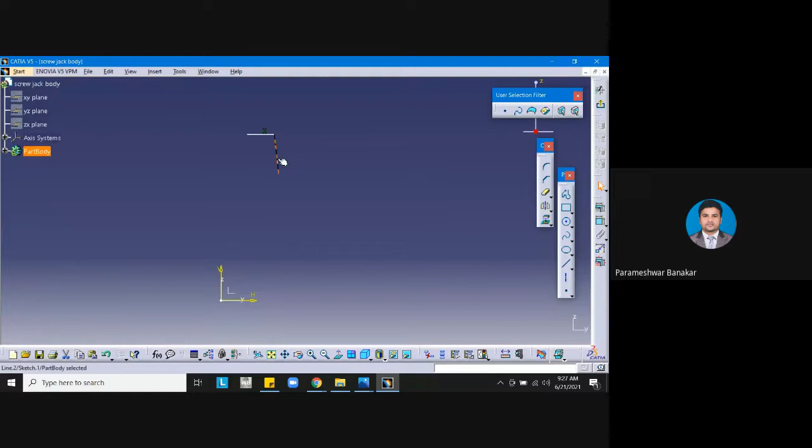I will take spline option. So from here I will come like this. I think it may look a little this way. Just a second, I'll make it straight. First you draw the rough sketch, then you can go for the final dimensions. Okay, I will just leave it here. Now I will go to the dimension, then I will draw them properly.

So height of this is 185. From here to here is 185. Okay, and from here to here it is 140. So before that, I will merge these two. Okay, I will coincide them with each other so that I will get the base coincidence. So it's done now.

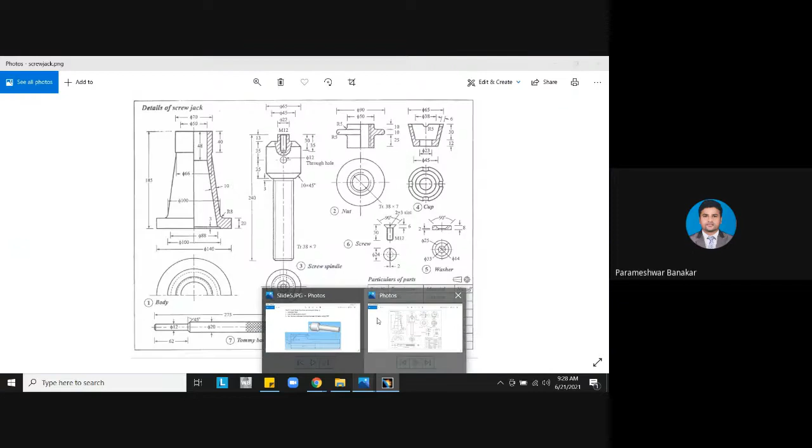So now what is the total height? Height is 185, right? So from here to here is 185. This is 400 is there. Make it as 185. See how it's moving now. So if this is happening, what you can do, you can bring up like this. There is a provision. Okay, you can just change whatever you want. You can do that. Okay. So 185 height we have given. Anyway, whatever method you are following, just follow that method and draw this particular hatched portion.

Okay, so now this height is 20, so this height I will give now. So this is 20. Go to constraint, give this as 20. Okay, just a second, I will bring it a little down. I'll make this as 20, and I think this is 40. This will be 40, right?

So vertical dimensions, sorry, in the z plane we have given all the dimensions. We need to look for the y axis, what all dimensions are there. So from here to here is 140. That means from central axis to the end of this portion is 70. Okay. So from here to here is 70. Let us give that dimension.

So this is 224. Okay, we will change it, and from here to here is how much? Let us see. So from here to here is 100. That means it will be 50. So this will be 50, and this is 140. So it must be 70. Okay, but it has to.

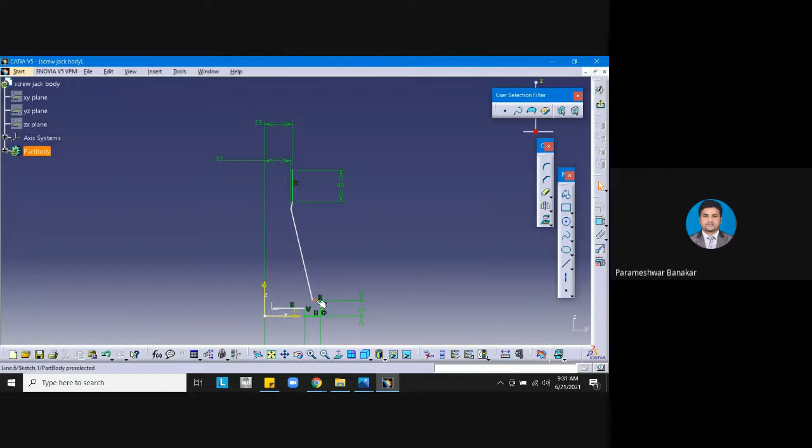And let us see, I need to move this a little bit like this, and I don't know what this one is. No, this also I need to write. So if we come here, this is also 100, right? From here to here is 100, correct? So that means it will be 50. Half of this will be 50. Before that, is anything else there? This is 3 mm. Okay, let us see. I will give a height of 3 mm.

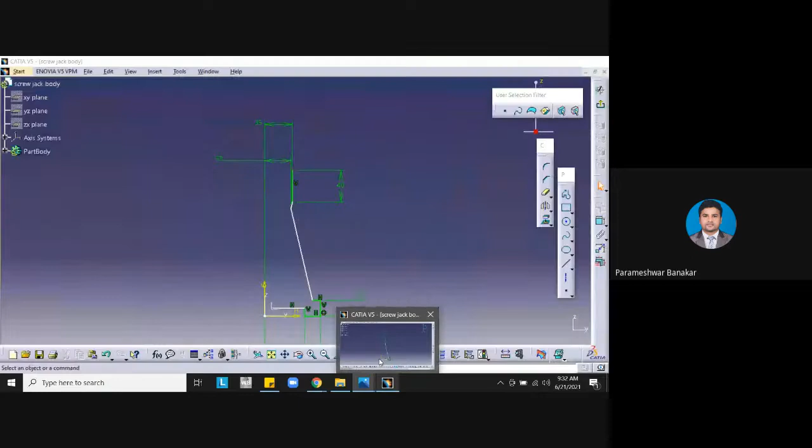I think this must be 10 there. It should be 3. Okay, 3 is there. Correct. So now from here to here it's 50, because there it is showing as 100. You can see this is showing as 100, but it is actually 50. From here to here is 50. From here to here it's showing as 60. I'll make it 50. Okay, done. You can see this.

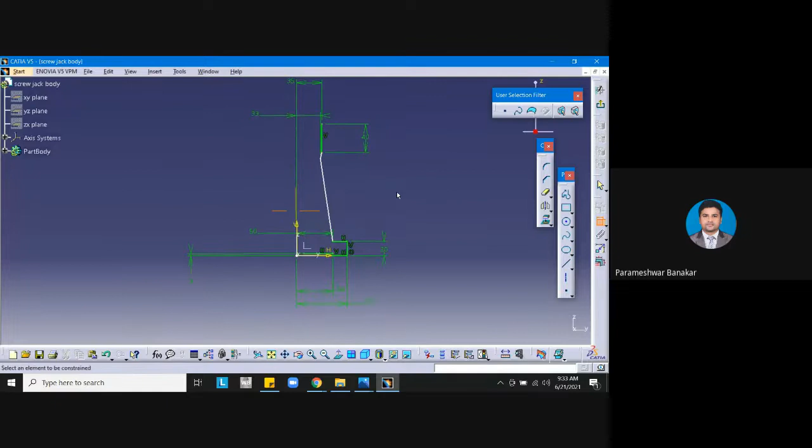Okay, so this is 40, this is 50, and finally this is 20, this is 50, this is 70, and this height from here to here is 3. Okay. So now again from this I will draw one more horizontal line like this, right? From this horizontal line to the base is 185. It is correct as it is. 185 is there.

Okay. So now, in order to create this portion, I have done it like this. This portion I have created. I need to create this line and this line. This line has a height of 48, but it will not be 48, it will be a little more than that. So we'll not consider this. If it comes in the exam also, don't consider this. Directly draw one line located at a distance of 25 from the central axis.

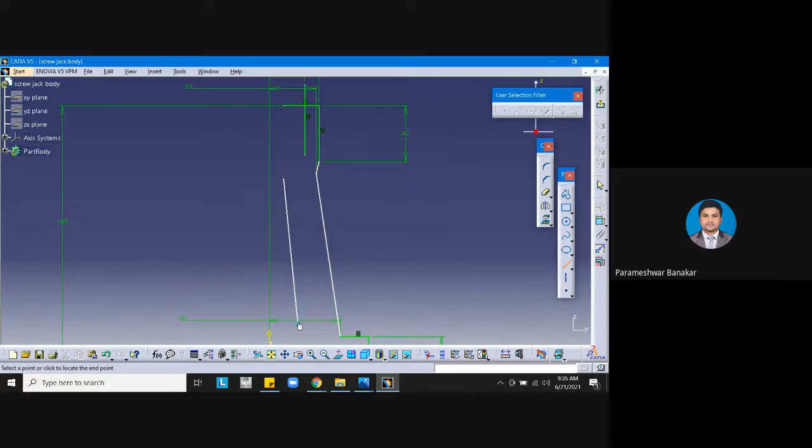So now I will draw one line, simply a random line, and I will give a dimension for it. From here to here is 25. Okay, it's 25. Now again I will create one more line parallel to this line, and the distance between them is 10. So I will go to dimension and mention that the distance between these two parallel lines is 10 mm.

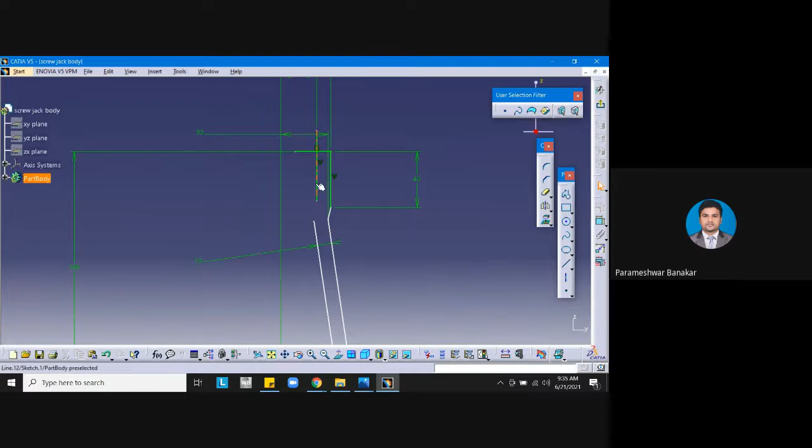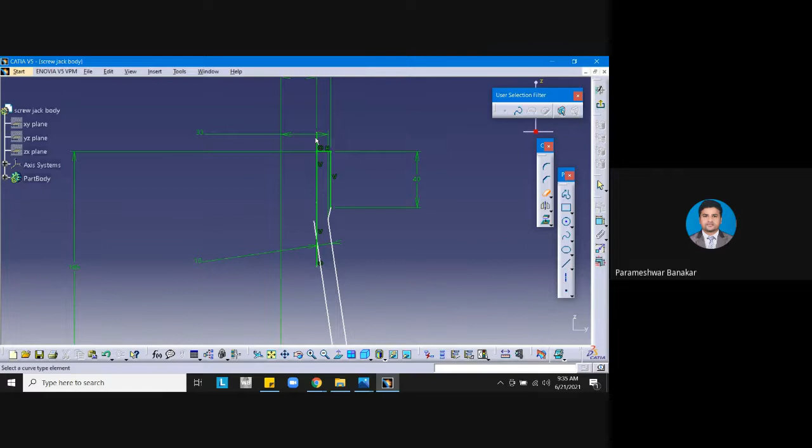Okay, 10 mm. I'll extend this line and bring it down where it should coincide with the line below. Just extend this line a little more. So it has coincided with this line, and the intersection point is there. Now you can use the trim command to remove these unwanted lines. Remove that unwanted line and this line as well. So now we have created this profile. Correct? We have created this profile.

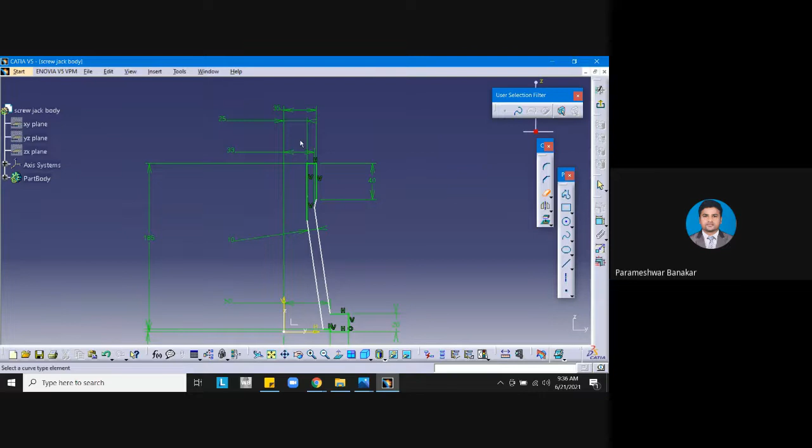So this is 40, this point is located at 33 mm, from here to here it is 35, and this line is located at a 25 mm distance, and these two lines are parallel. Make them parallel by applying parallelism, and the distance between them is 10. From here to here this point is 50, this is also 50, this is 70, and this length is 3. So now I will exit from the workbench.

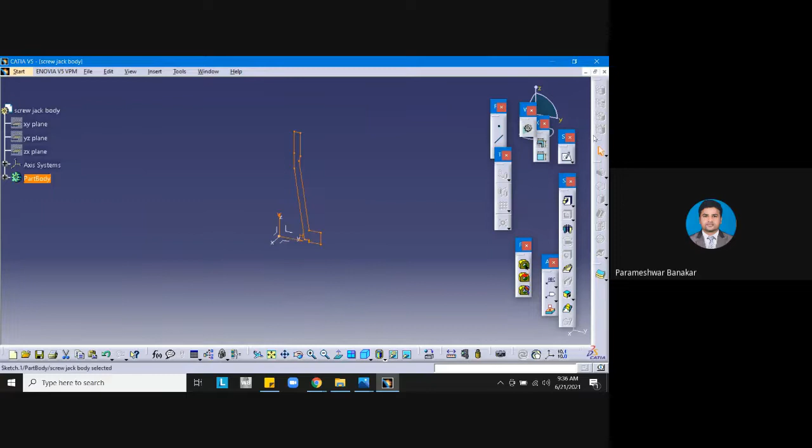Okay, I will exit from the workbench, and I will try to revolve this. Use this shaft option, I will ask for the angle. You give 360 degrees, and then axis it will ask, no selection.

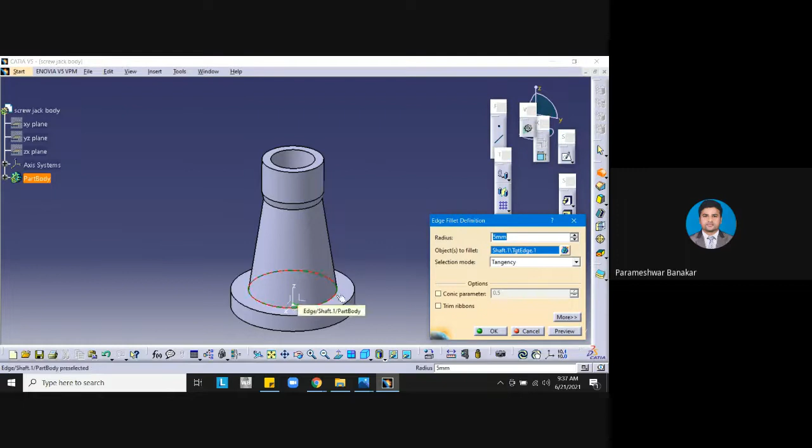Now I will select the axis. Preview, give OK. So your body of the screw jack is ready, but this radius we have not yet given. Now we will give radius of this curve. For that, go to fillet option, edge fillet is there. Click that and select this edge. It will ask how much radius you want. Radius should be 8, give OK. You can see, so this is done.

So body of your screw jack is done. This is one part. Now you can save this file, save. I will save in desktop itself. Screw jack body, I have given name, saved. So one part is ready.

So similarly now we need to build the second part. This also we will try to draw and see how we get the 3D model. Here also same case, you have to create half drawing of this particular screw spindle, like this. It will go like this, come like this, like this way, half. Then you revolve in the same manner as before.

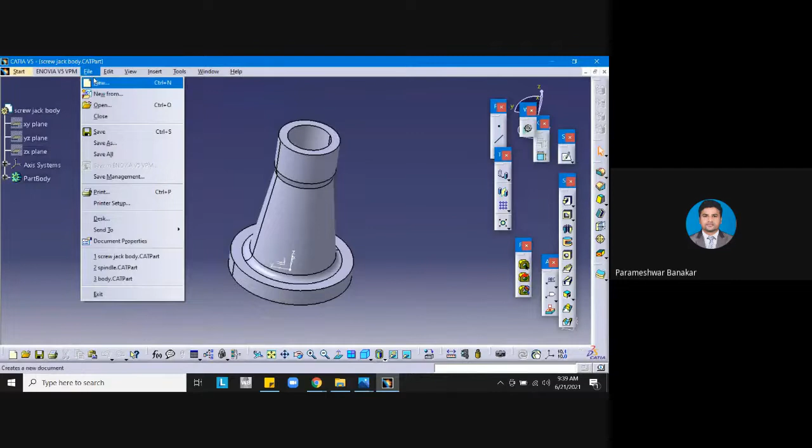So what I will do now, again I will go to CATIA, start mechanical design, or go to file, new, CATIA part is there, let me search. As part is there, you OK. What is this? It is spindle, screw jack spindle, give name.

Then as usual, hide these three planes. Go to insert, insert new axis system, you okay. Select YZ plane, go to sketch and create the profile of the spindle. So we need to create the profile of the spindle.

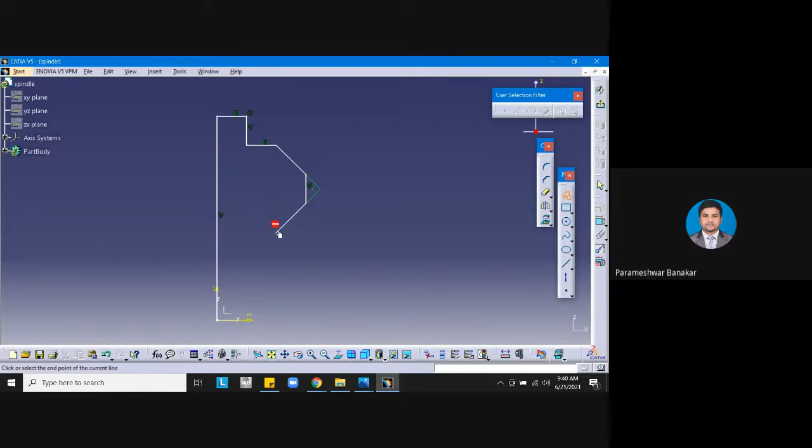For that, what I will do, I will just draw first the rough sketch like this. Let me draw the rough sketch. I think this is how it looks like. Let us see. Simply you draw first, don't worry about anything. Just draw a rough sketch like this and finish it.

Later on you can give the dimension. So what are the dimensions now? This is a rough sketch, how it looks now. What are the dimensions? You can see this, the thread diameter is 38, of which length is 7 mm. So 38 means this diameter is 38, that means from here to here it will be 19.

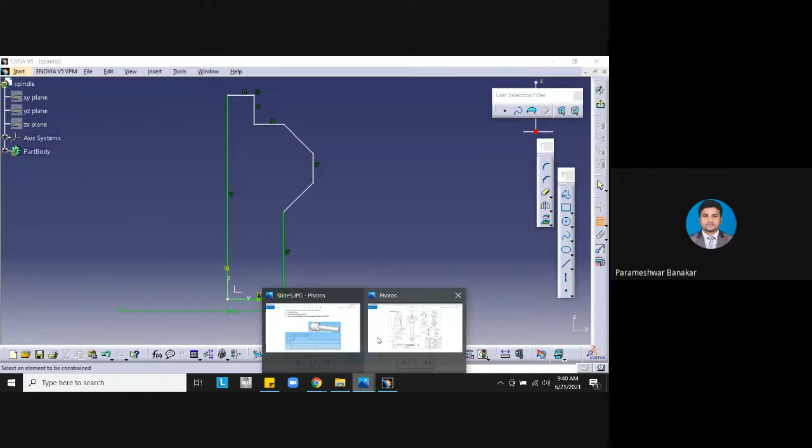So that dimension I will give first. From here to here is 20, it is showing. I'll make it as 19. Then what is the height? Height of the spindle is 240. From here to here you can see 240 is there. So I'll give 240, from here to the base is 240. This is 70, make it as 240.

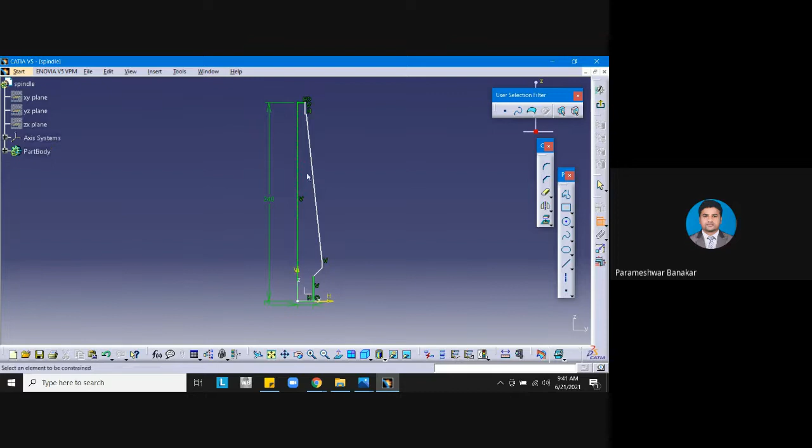So it will go like this. Don't worry, okay, don't worry. Always you have freedom to modify the diagram, whatever you want. Keep like this, whatever it actually deserves.

So now from here to here, the diameter is 65. That means from axis to the extreme end is 65 by 2, so that will be around 32.5. Let us see, I will give that dimension as well. From here to here, select this, from this line to this line is 65 divided by 2, 65 by 2.

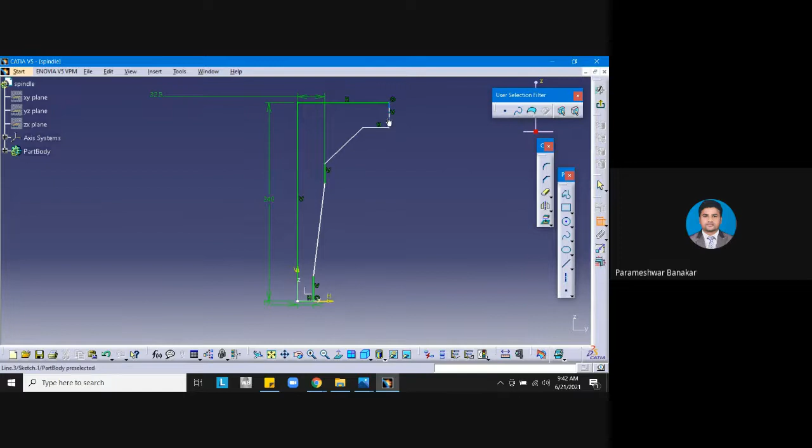Okay, this is done. So what is this coming extra? What we can do is you can trim, and you can draw one more again. If it's not coming properly, you can draw again. So go to line command, draw one small line.

Okay, and see what is the dimension of that line. So from here to here is how much? This is 22, right, so this is 22. 22 in the sense it will be half of that, it will be 11, from central axis it will be 11. So go to dimension, give this as 11.

And below this, one more line you create, and find out the dimension of that. So this dimension is 13. So this length is how much now? 13. So come to constraint, 10 is there, make it as 13.

Okay, so after this 13, it has come in this way. What is the dimension of that? 45 is there, the total is 45, from here to here. That means from this axis to this point is 45 by 2.

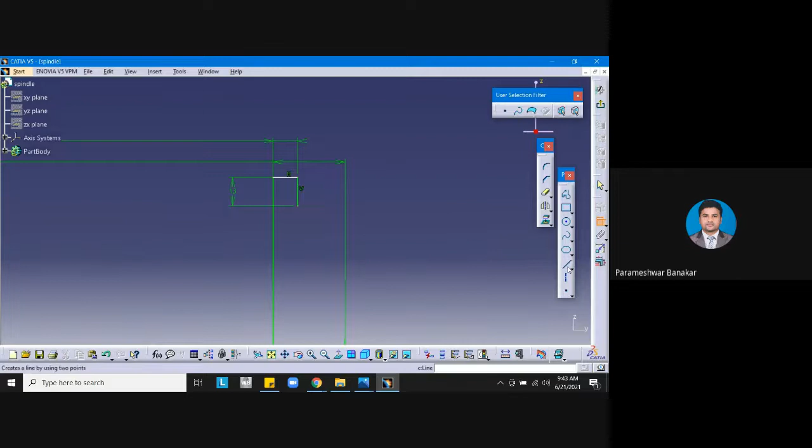Let me draw one more line from here to here, and I'll give the dimension from this central line to this extreme end. This will be 45, that means 45 by 2, which is 22.5. Okay, this much we got.

So now I will extend this line, and also extend this line as well. So now from this line and this line there is a chamfer, exactly it has to come here only, this point. So for that I'll trim this first, and trim this as well.

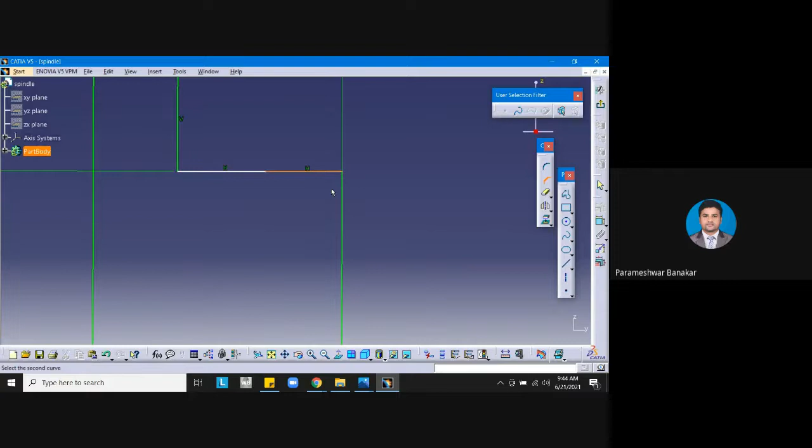Now I will apply chamfer. You can see here the chamfer option is there. Select this and this. Chamfer should be 10 mm, angle should be 45 degree, so this is 45 degree. The length must be 10 mm.

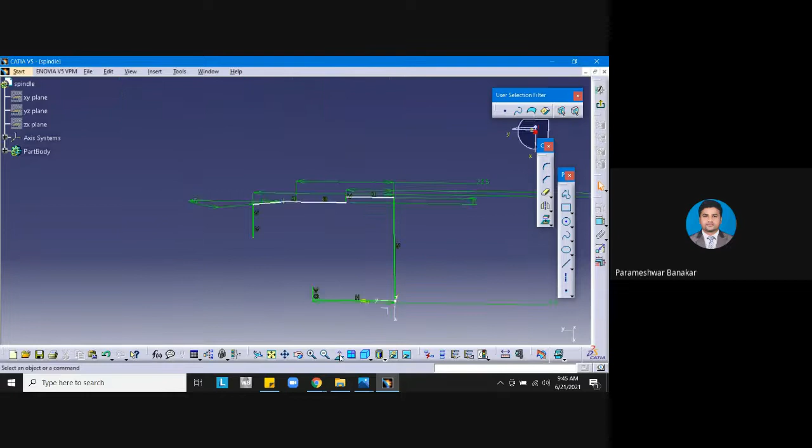Length must be 10 mm. This chamfer must be 45 degree, meaning from here only it should start. 10 into 45 degree they have given. If it is not coming exactly at this position, then what we can do is delete this, make it as it is.

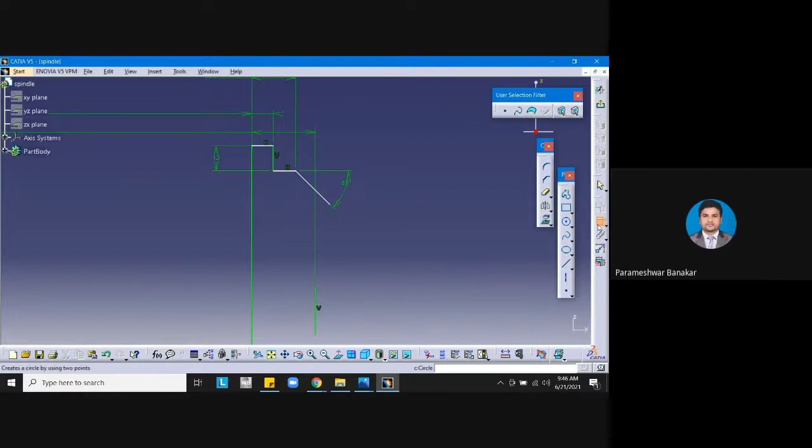From here you draw one line, and its angle must be 45 degree, from here to here. Angle must be 45 degree, and length must be 10 mm. Now you can extend this line a little up.

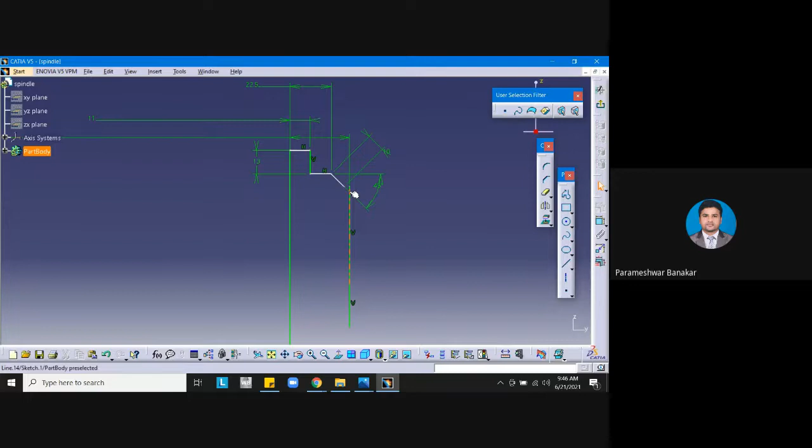Let me have a look. Okay, it's not exactly 10 mm like it will take, because if I do chamfer here, it will extend till here, the length will be more. So we'll have to go back to the previous method only, otherwise it will not get coincident with each other. Or else later on we can give the chamfer option in the part modeling, there also we can do it. But here we'll try to finish here only.

Let us see. This is 30, and this is 11. 13 is over, so from here to here he has given 45 degree, sorry, 45 mm is the dimension. That means from here to here it is 22.5, and from here to here is 65. 65 by 2.

65 by 2 is there. But if I remove this angle, I will remove this also. Let us see, I will try to extend this line and draw the chamfer. So trim this and apply chamfer.

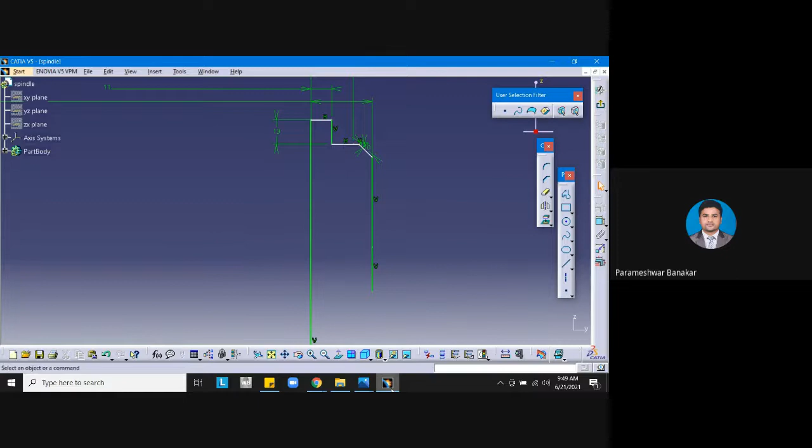No need to change anything, let it be like this. So now the total height, this is 30, 13, and below this must be around, let us see here, 13 is over, next is 35 plus 35, that means 70 length is there that we need to see.

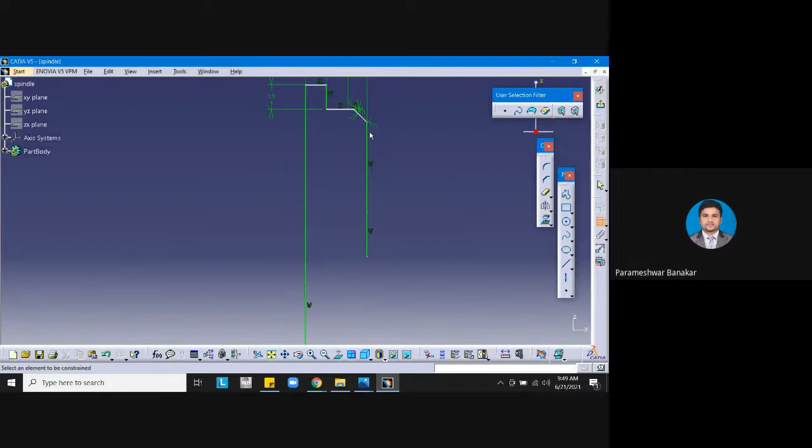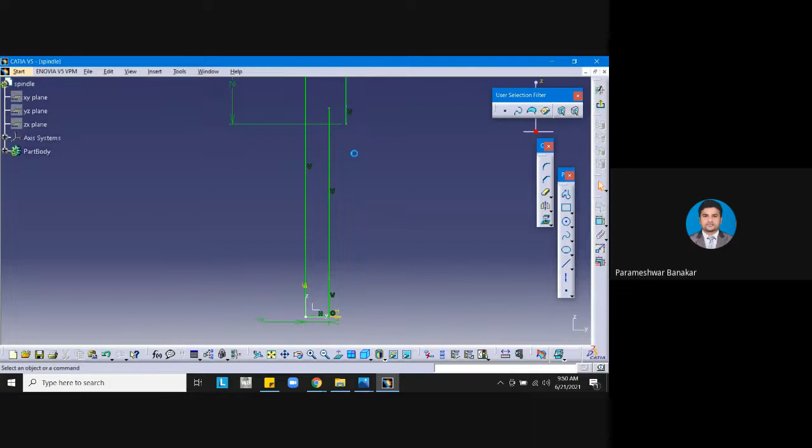So go to dimension, from here to the below point, let us say from here to here, this should be 70. So now after this you can extend this line using line command, extend this line, and also extend this line.

Now you can apply chamfer, I will remove this for time being, I will apply chamfer here. Again same case, it should be 45 degree and length must be 10, length must be 10 mm. Okay, so now this is done.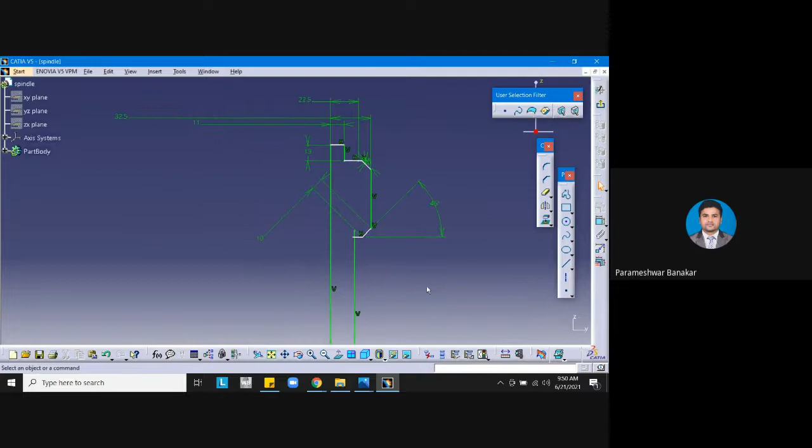Now use trim command, remove this extra line which has come here. And here also I think it is there, you can see, remove this as well. Just control Z, supposed to remove this one, green line.

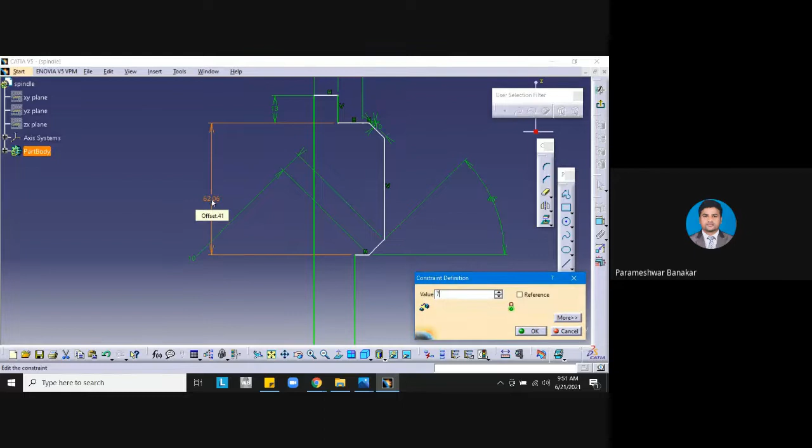So this is done, but now from this point it must be 70 degree, so 70 mm dimension. Let us see. 62.06 is there. It should be 70. Okay, so we have given 70.

So this is 45 degree. This is 10 mm, this is 10 mm. Okay, so now your profile is ready.

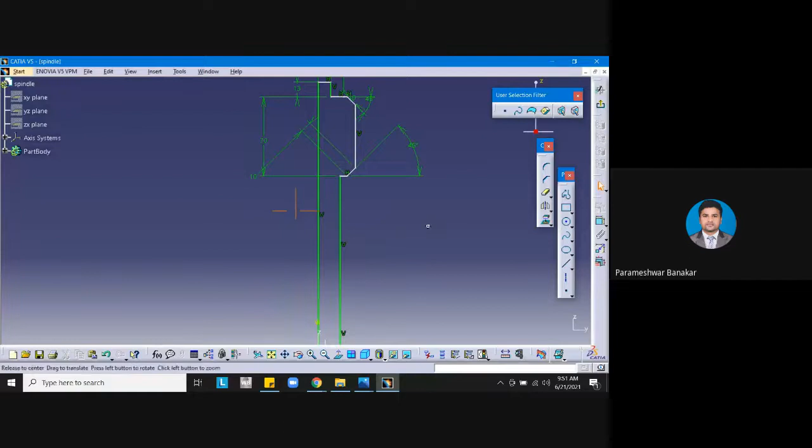What you can do is revolve this, so exit from the workbench. Go to shaft option, select the axis, select the 360 degree angle, select the axis. Preview, okay. So the spindle is ready now.

Okay, so in this spindle, one hole is there, M12, 12 mm diameter simple hole is there. This hole we need to create, which is having the length of 35 mm. Okay, 35 mm length is there that we need to create. Diameter of hole is how much? 12 mm. That will create.

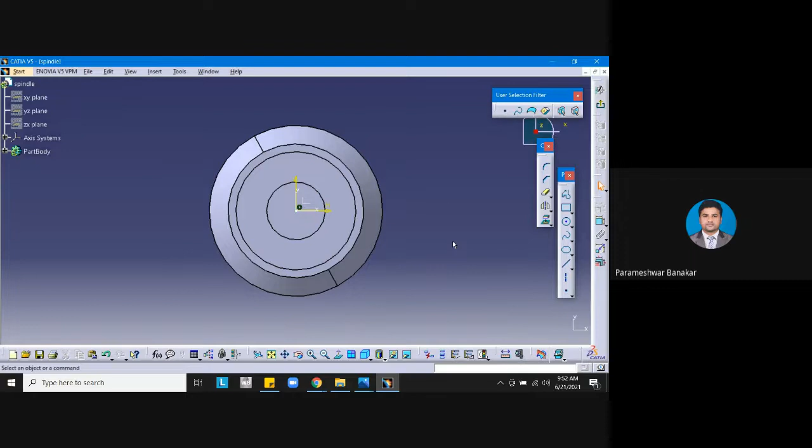So for that, select this one, go to sketch, create a point exactly at the center. Exit from the workbench.

Here you can see one hole option is there. Click this, and select this point where you want to create the hole. So it will ask which kind of hole you want to create.

So what I will do is create a blind hole only, and then depth is this much. Instead of flat bottom, you can have V bottom. So diameter of the hole is how much? M12, diameter of the hole is 12 mm. Give it as 12, so depth is 35 mm.

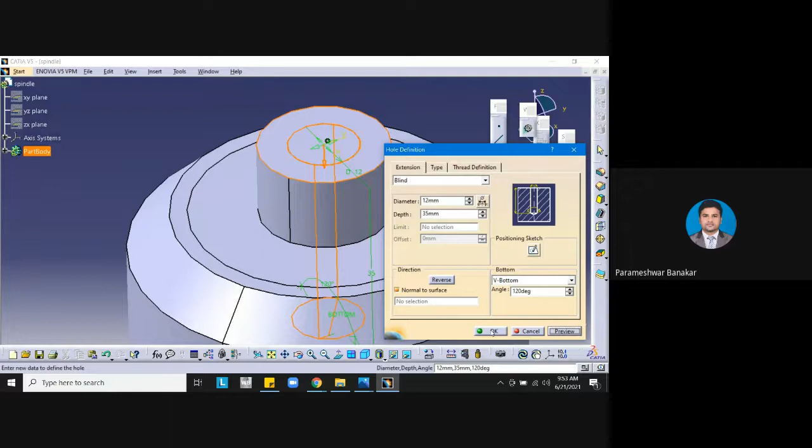35 mm is the depth. Okay, then you can preview this and give okay. So the hole is created, you can see this, the V bottom hole is created.

So again, if you go to the same sketch, here one more hole is there, 12 mm diameter, which is called a through hole. This also we are supposed to create. For that, go here.

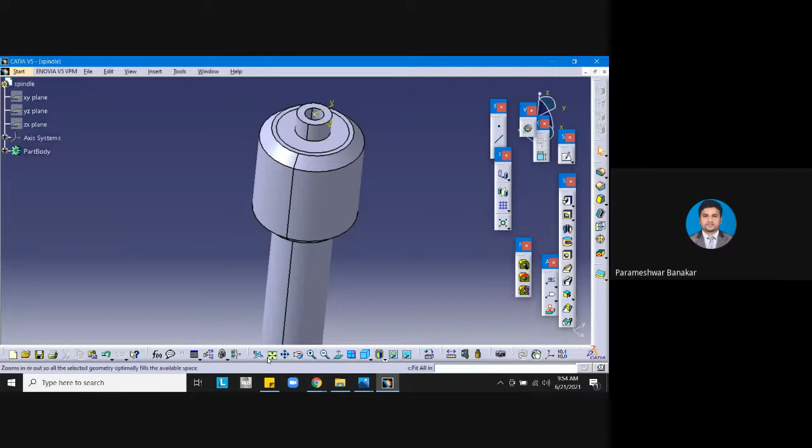Okay, select this, select YZ plane, go to sketch, create one circle. Okay, what is the diameter of that circle? That is 12 mm. So go to constraint.

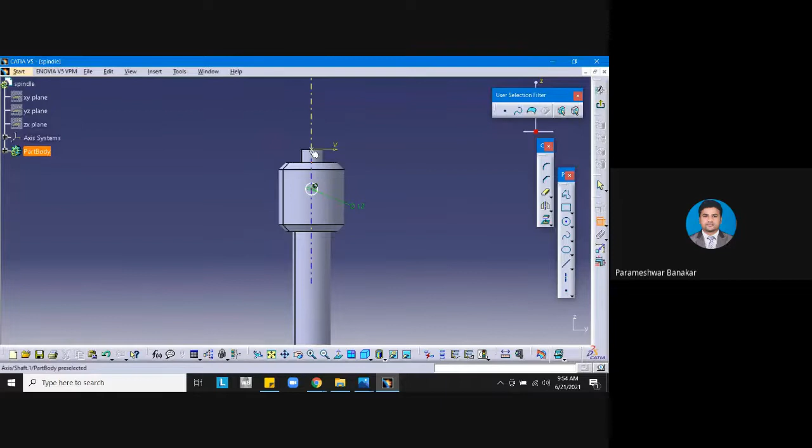Diameter is 12 mm. Where it is located? This is located exactly at 35 mm plus 13, that means from the top end it is located at 48 mm. At distance of 48 mm from here to the circle's center is 48 mm. Sorry, from this it is 48 mm. It must be 48 mm.

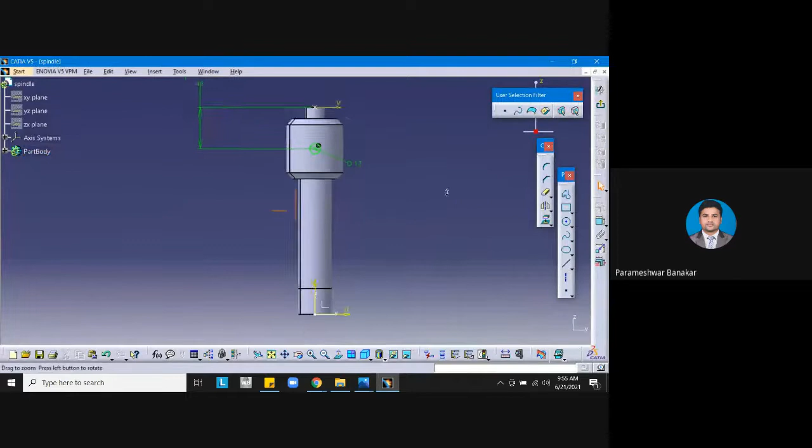This dimension is how much? 12 mm. Okay, so now this is created. Now what you can do, exit from the workbench, go to pocket option.

Okay, mirror extent, give mirror extent, and you can increase the dimension. Let it go out of the boundary, then preview. Okay, so you can see this, the hole is also created.

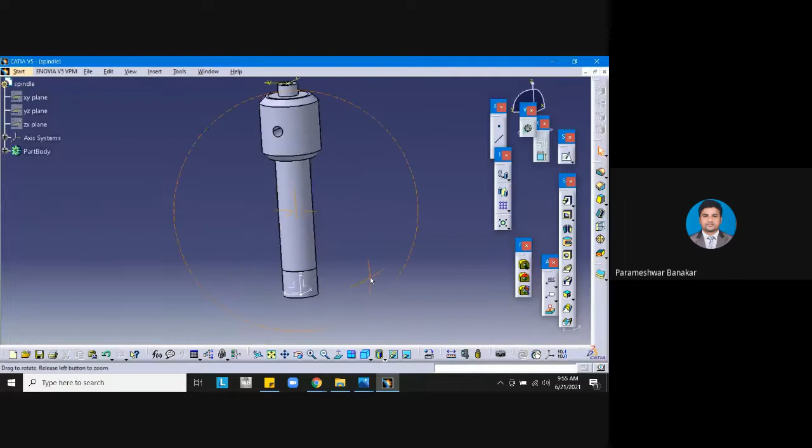So now for this, here the thread is there. This portion we have threading. Okay, you can see here the threading is there, that portion, thread 38 into 7 mm.

Okay, so the total length is how much? This is 240. 240 minus 86. That much of thread length we need to have. So just I will do 70 plus 73, 73 plus 13 is 86. So 240 minus 86 will be 154 mm.

So 154 mm will be your thread length. Okay, that also we can give. So what we can do is select this. I think thread option, we have to search for thread option.

Just a second, I think somewhere it will be here only. We need to drag it out. Thickness, I think here, thread. It is there, thread option is there.

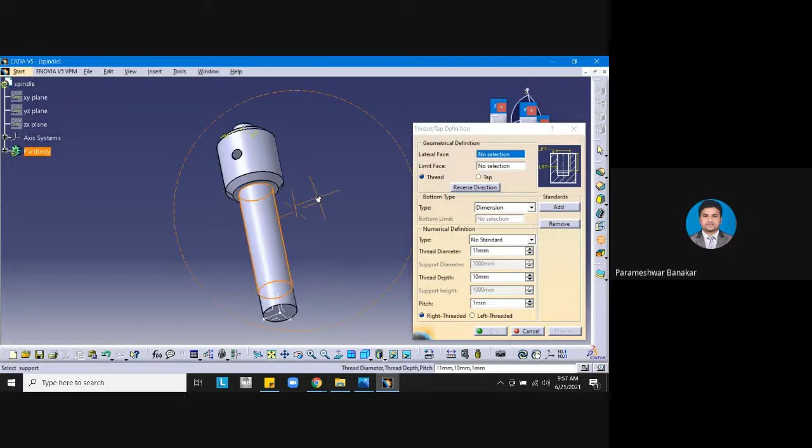Okay, so now it is asking lateral surface, how much you want the thread. Okay, so limit the face. I will limit the face till here. It is not coming, okay, we can create both at a time. Just let me select this as well.

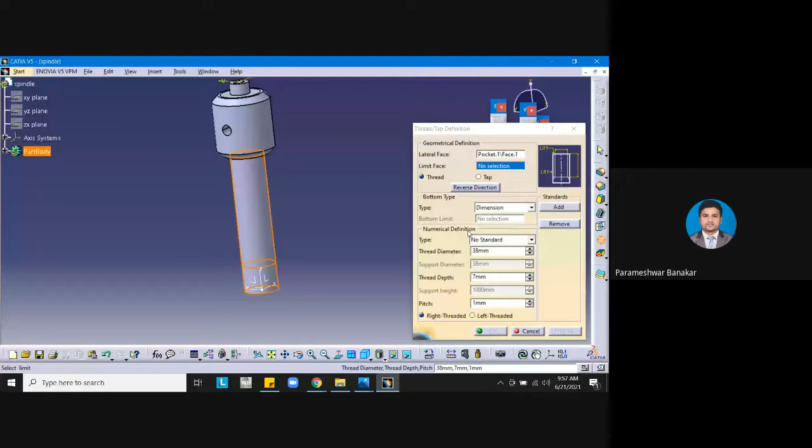So thread diameter is 38 mm. Thread depth we can give 7 mm as shown here. 7 mm is there. Okay, so total length, the dimension is how much? 154 as we found it. So limit face we can give this limit face.

Okay, we can give this, but if it is asking for dimension, then we need to add the dimension, but it's not showing. 38 diameter, thread depth, sorry, thread depth is, let us see, it is 7, it is asking 150. Actually thread length is, it is not asking. So that is a thing here I'm looking for.

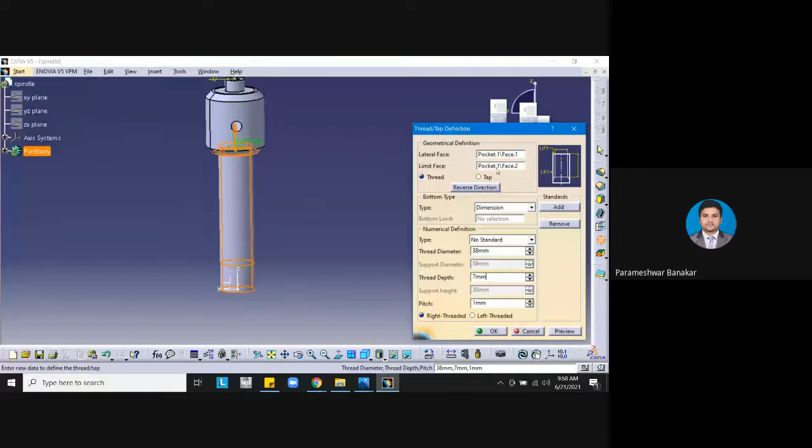Lateral face 1, 2, limit face 2. Okay, dimension, let us see. Anyhow it is not visible. Okay, let it be. You just give up to the surface here. Select the limit face and lateral face. Or else lateral face I will select something else. So I'll go to thread option. This is the lateral face.

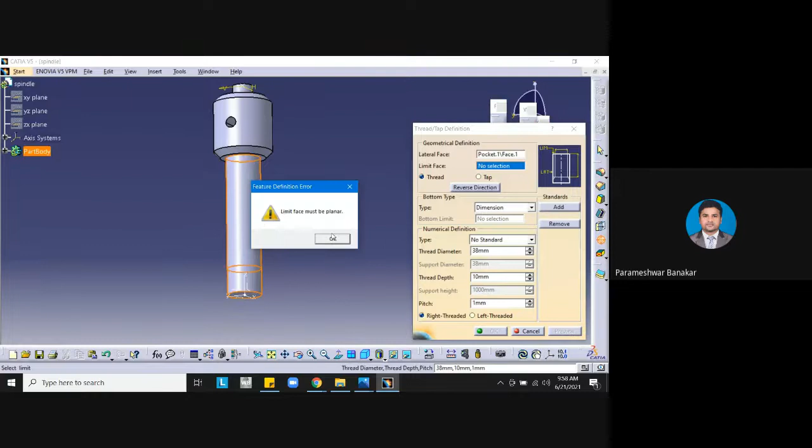Okay, just a second, it's not taking. Lateral face is selected. So limit face will be this. Okay, I'll go for 7 mm thread depth. So preview. The tap is out of support limits.

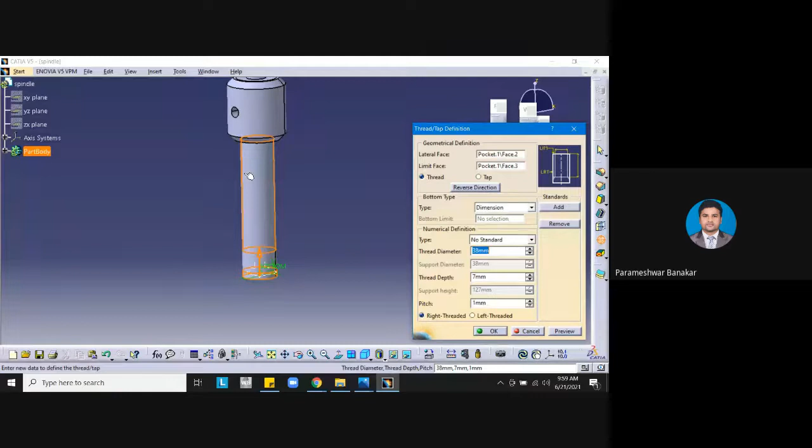Okay, because it is not having the one particular... Here, cut section is there. So we need to create one whole section which is not been cut. Then only it will take. Not an issue. We can do the threading later. Till here, I think you have understood.

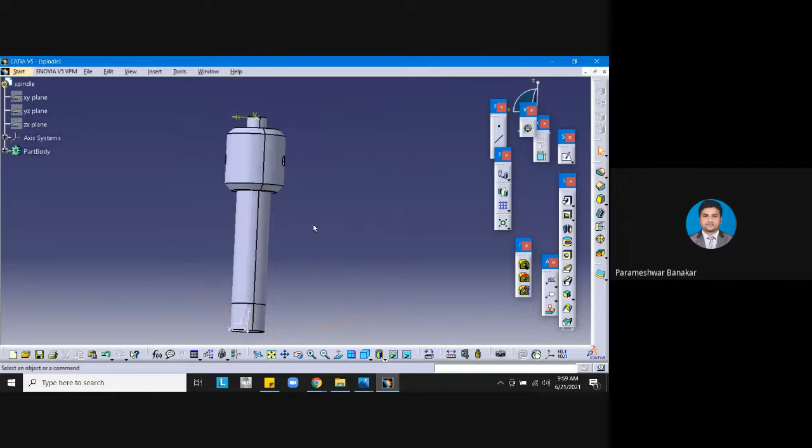We'll make the thread later while doing the assembly. Then we can join them. Otherwise, once again, I will build the same thing and I will create the thread there itself while doing the assembly. But remaining procedures except threading, everything is done here. So now we need to go for the third option.

So this is the nut we need to create. For that, we are supposed to have this particular profile, then revolve again, then you will get this nut. So again, I'll go to start mechanical design, or else I will go directly file, new, and I will take part new. New part is nut.

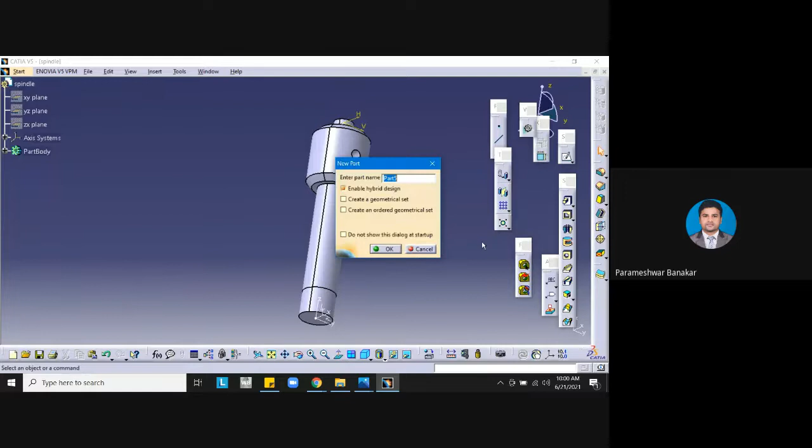So hide this and insert new axis system. So this we need to create. The hatched portion is there, you just create this hatched portion, then automatically rest of the things will come. So I will go with 50 and 90, and this is 10, this is 10, this is 25. This is easy to create.

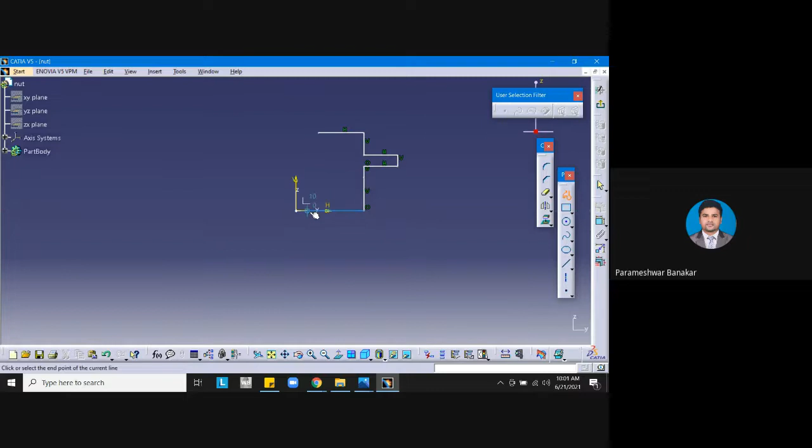So let me select the right plane, go to sketch option, I'll select this profile. So like this it is there. I hope it looks like this. Now we'll apply the dimension. So total height is 25 plus 10 plus 10, that is 45. From here to here is 45.

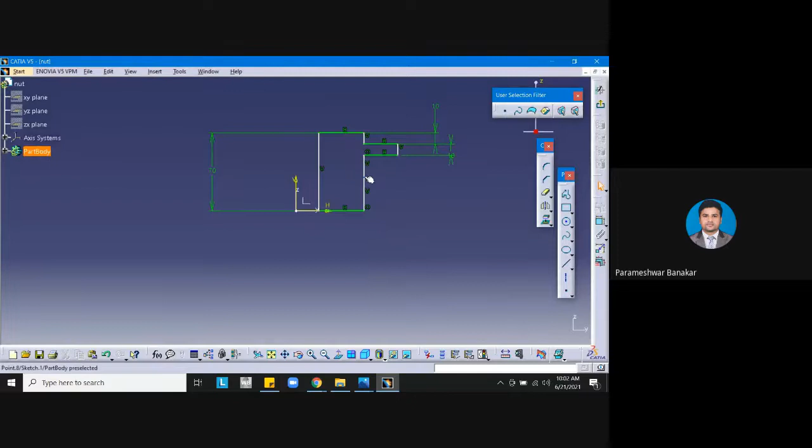From here to here it is, I think, 10. This is 10. And this is also 10. And this must be 25, I think. So this has 45, and automatically this will be 25. So let me trim this. And let me check the dimension of this. Yes, 25 is there.

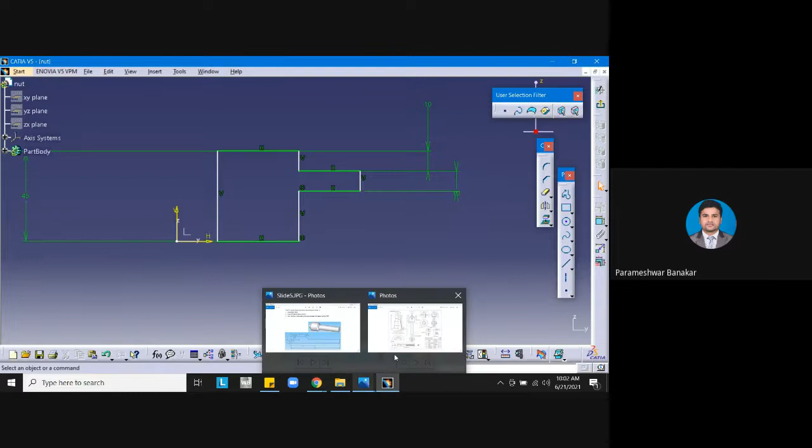So now that dimension I have given, from this axis to this extreme end is 90. That means it will be 45. 45 mm, and inner one is 25 mm. And the thread minor diameter is how much? 19. So from here to here is 19. Then it will be 25. Then it will be 45. So I will come from the central axis. So this must be 45.

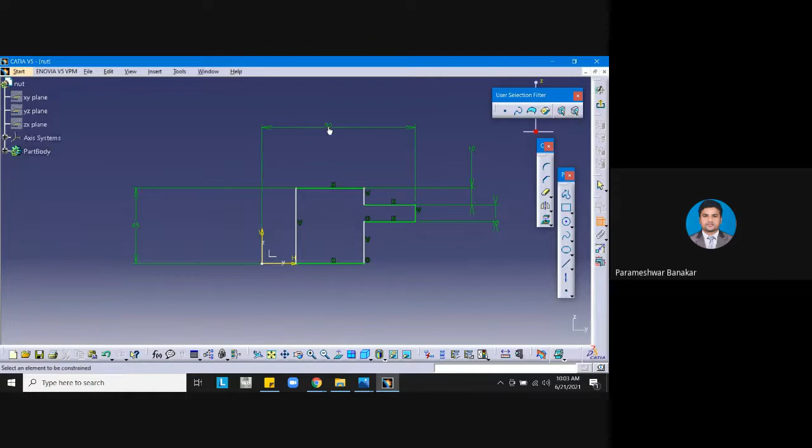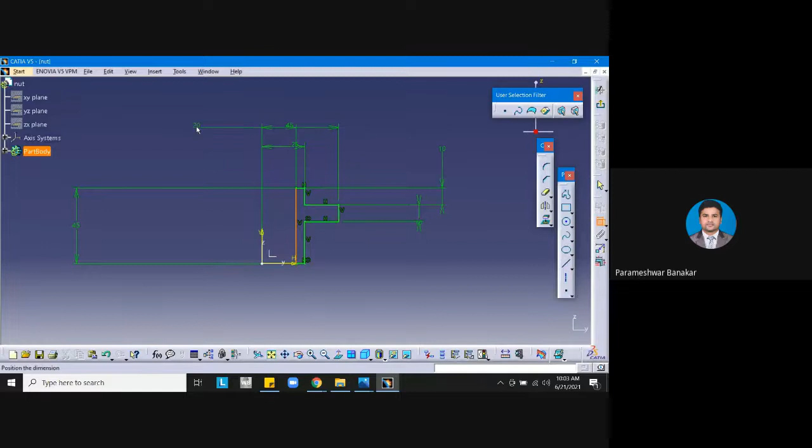And from here to here 60 is there. I will change it now. So from here to here is 25 first. This must be 25. This must be 45. It's not 90. It should be 45. So now from here to here is 19, because 38 is the diameter, right? So make it as 19.

So now we have got the nut portion. Exit from the workbench and revolve. Use the shaft option. Give OK. And now go for edge fillet. You can see this is having a 5 mm radius, and this curve is 5 mm, both the sides. We'll try to do that.

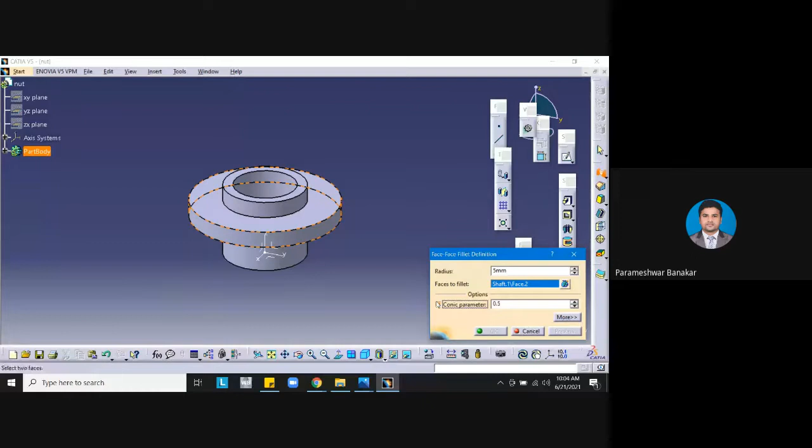So I'll go to face option. What is it called, face fillet? I'll select face fillet. This face I want to have the radius of 5 mm. Why it's not taking? Just a second. What is this? Edge fillet. Let us see edge fillet. 5 mm.

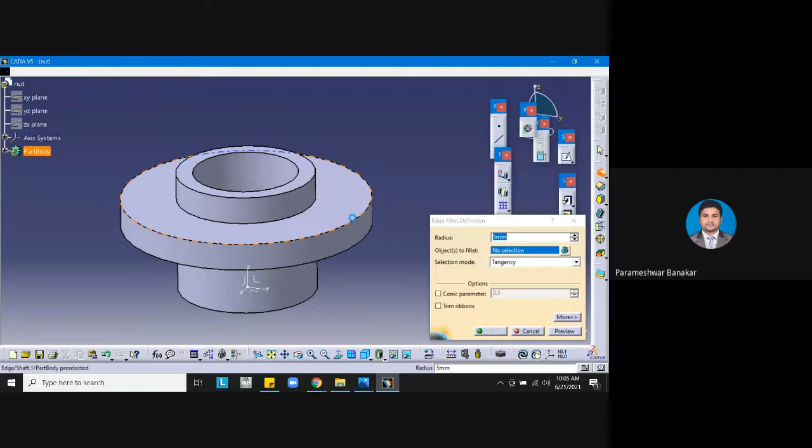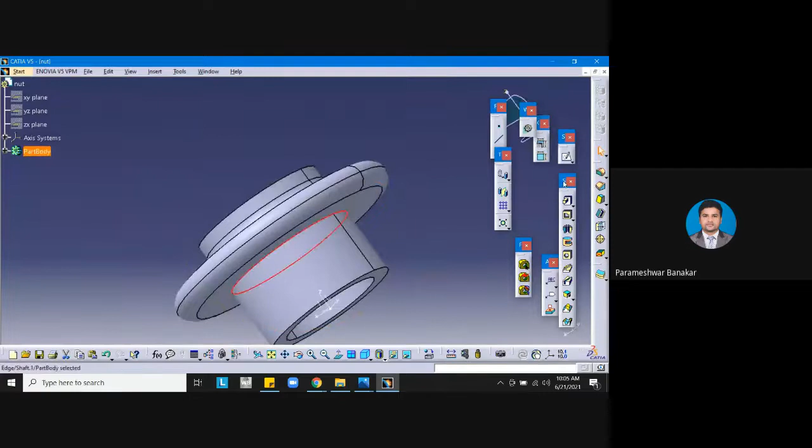Okay. And is it 5 mm below one? Edge fillet 5. Okay. So 5 mm is done. Radius, and this is also 5 mm. And below also 5 mm radius. Let's fillet it. So now you can see here this portion is done, that is the nut portion is done, which is like this. Okay, so this is 5, this is 5, and here also below is 5. So I will save this, save as nut.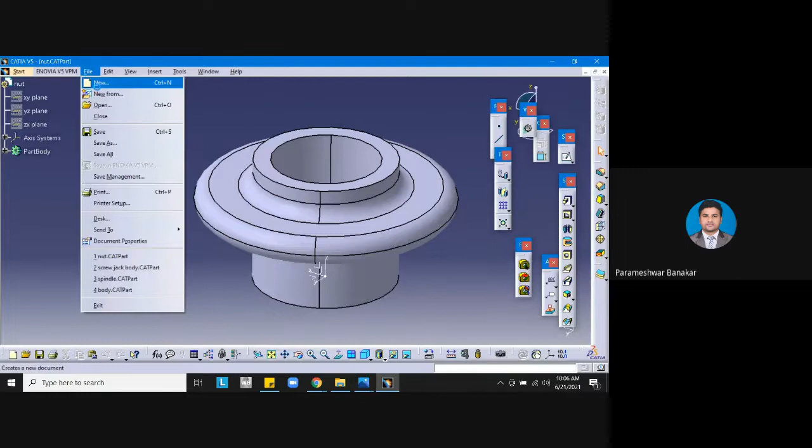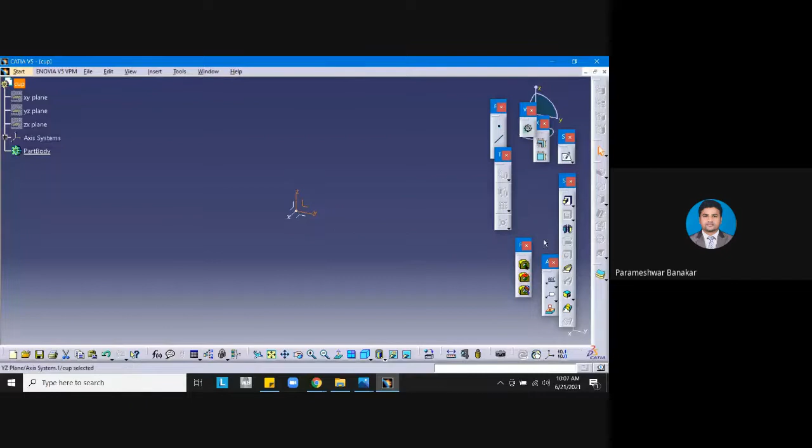What is this? I think cup is the name of that particular part. So make it as cup. As usual, hide the planes. Okay, sorry, before going to sketch, insert a new axis system. Select YZ plane. Go to sketch. Create this hatched portion. First I will create the rough sketch. Then I will put the dimensions.

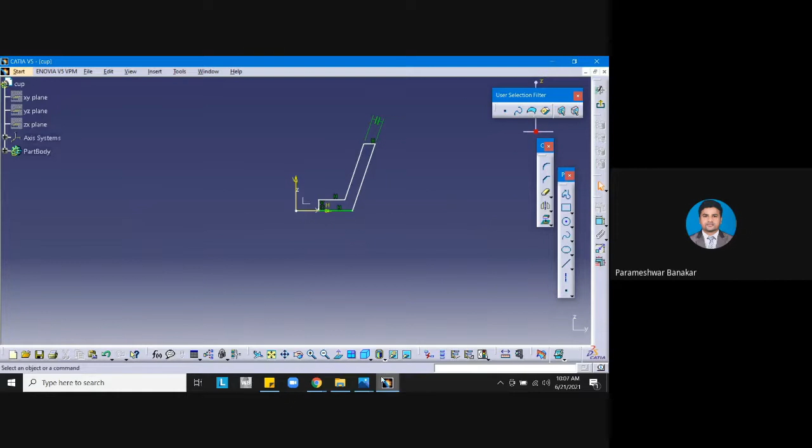Okay, the rough sketch I have created. So I will give the dimension now. So from here to this line, this is 38. That means 19 will be. From the end it is 65. Okay, and from here to here it is 45, and here it is 23. So here to here it is 65. No, 65 by 2 I will give.

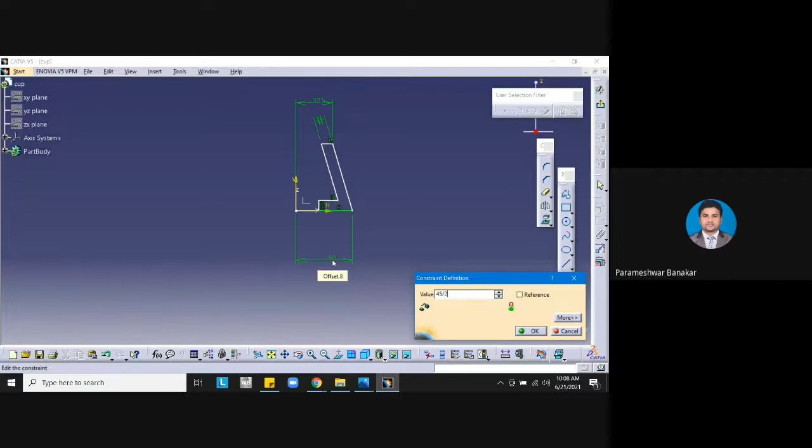Go to constraint. From here to here is 65 by 2, and from here to below is 45, 45 by 2. So from here to here is 45 by 2. Okay, and from here to here, this is how much? That is 23. That means 23 by 2.

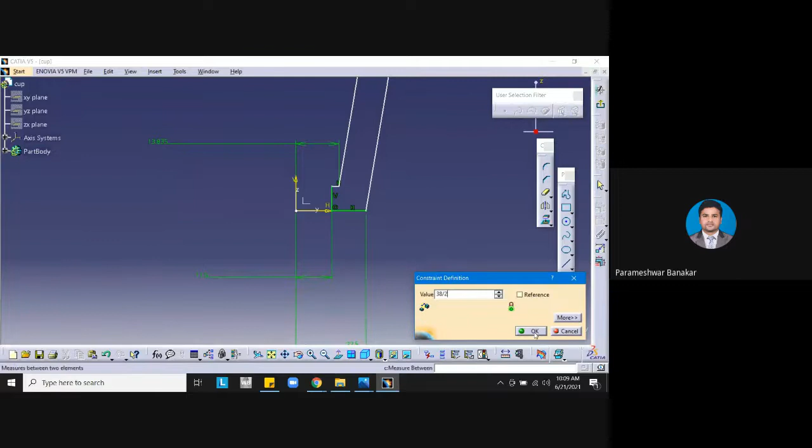And from here to this point, how much is it given? We can see this. From here to this point is 38, that means 19. So 38 by 2, that will be 19. Okay, and automatically this must be 6, I think, or 4.7 is there, but the exact one is 6. Let us give the value as 6. Okay, you can see this.

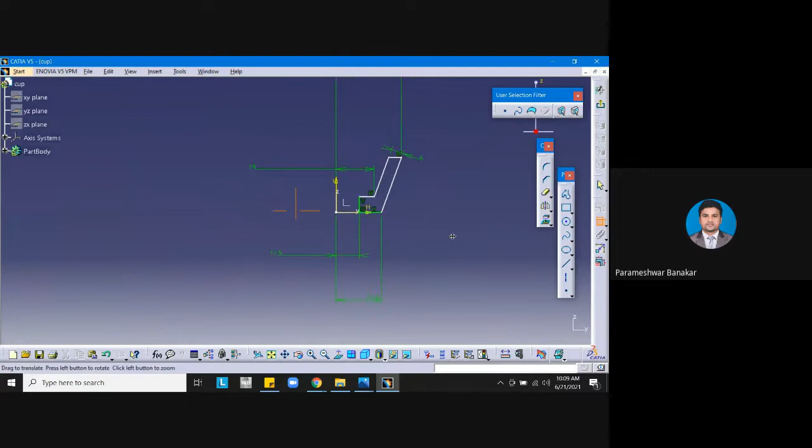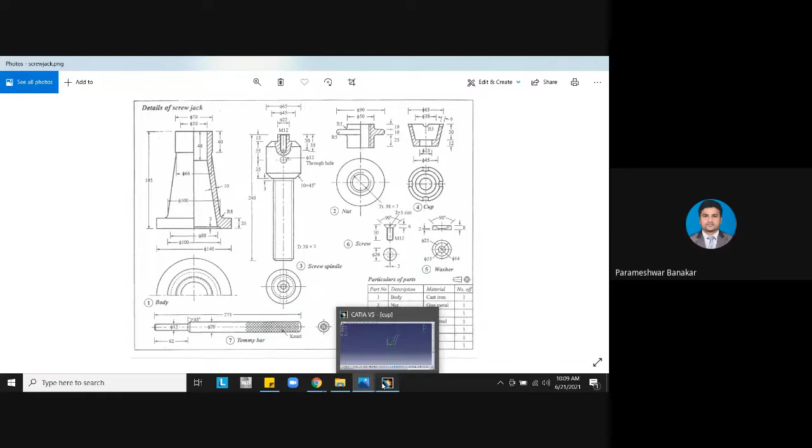So we have created this part, 45, 23. So now what is the height of that? Total height. What they have given is 30 plus 12. That will be 42. Okay, 30 plus 12 is 42. So the total height from here to the base is 42. Okay, 42. So this cup we have created right now.

What we will do is we will revolve this. We exit from the workbench. Go to shaft option. Revolve. Give OK. So cup you have got, right? So now what I will do? I will select again here. Go to sketch. I want to create holes. These holes, 4 sides are there. 1, 2, 3, 4. 4 side holes I have. This hole I need to create.

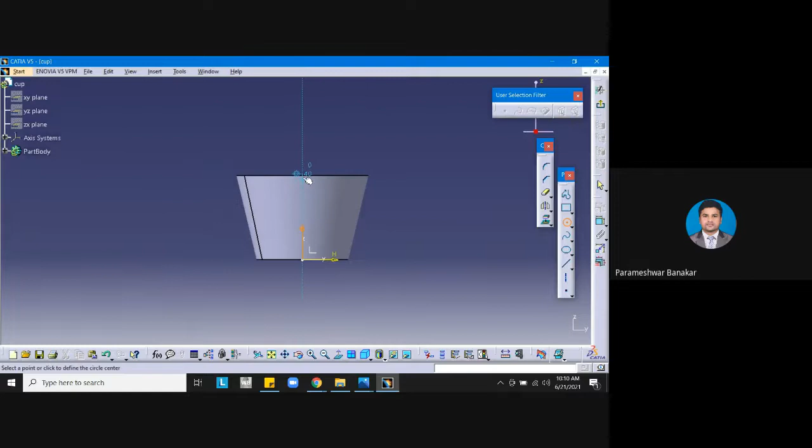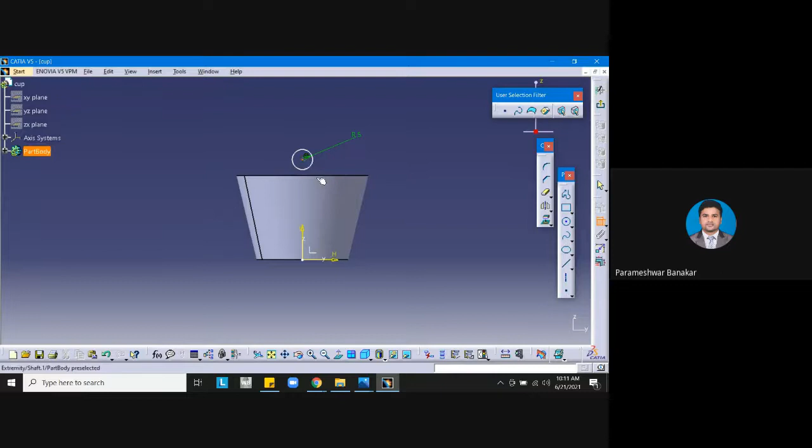That is having the radius of 5. Okay, 5 mm radius. So what I will do? I will get circle. Just draw one circle. Give the dimension. Change diameter to radius. Make it as 5. Give OK. Go to constraint, then select this point and this line, make it as coincidence. Okay, and this must be lying in the same axis. Then exit from the workbench.

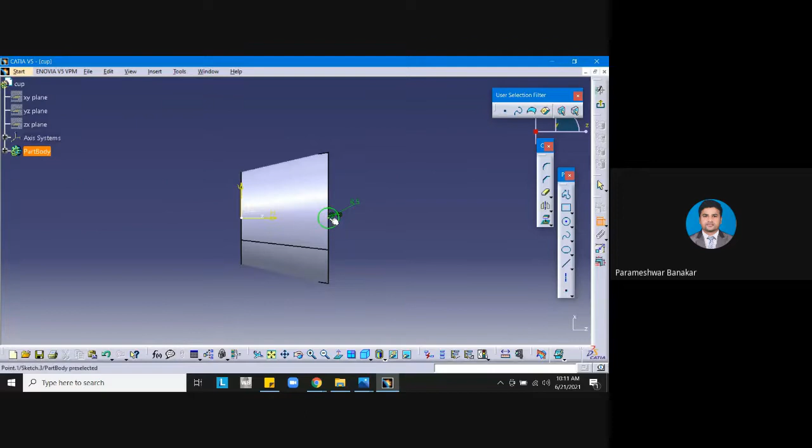Then pocket option. Go to mirror extent. Increase the dimensions. Give OK. It is cut. Now similarly you select this one, XY plane. Go to sketch. Okay, then draw one more circle. Same manner. Give the dimension. R is 5 mm. Then select the center point of the circle, then this surface, make it as coincidence. Make sure that the center point is located in the one axis. Okay, so exit from the workbench.

Just a second. Hello, sir. Sir, good morning. I am in class, sir. I will just call you back after 5 minutes. That one I will clarify with them. Now. Hello. Okay, I will just call them and I will ask him, sir. Just a second. Okay.

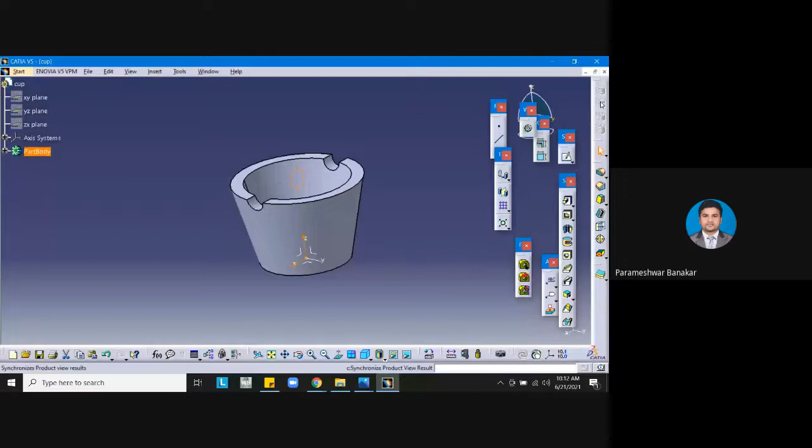Yeah. So now what you can do is select this, go to pocket option as usual, use mirror extent and give OK. So now you can see your cup is also ready. Okay, your cup is ready. So these things we have got. So this is how you can create parts like this.

Okay, and similarly the remaining parts are there that I will create. I think three are remaining. One is screw, one is washer, and one is Tommy bar. So these are also easy ones. I will show you that as well in the next class. Or else I'll just upload the video. You just watch it and learn it. Along with assembly also I will explain in that particular video.